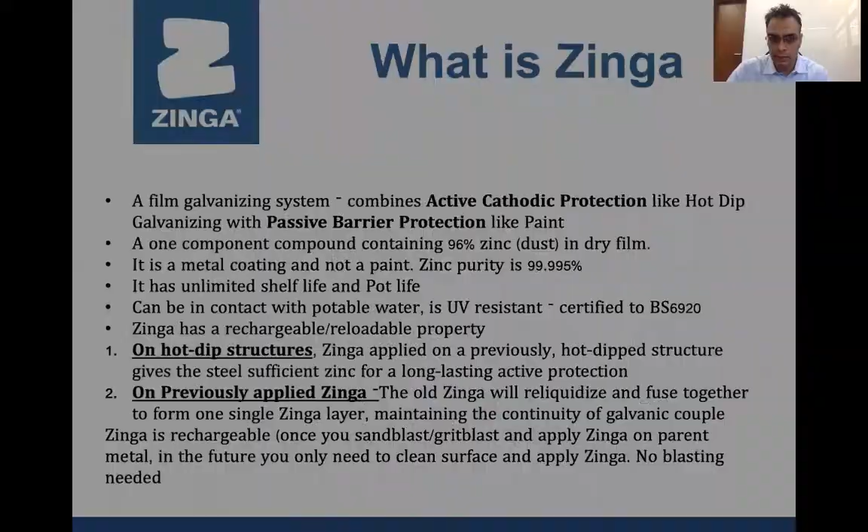It is a one-pack system, so its application is very easy. You just need to dilute it with Zinga Sol, which is the solvent required for this. It is approved in the Indian Railways and is already in the schedule of rates. We've applied Zinga in the north, east, west, and south over bridges. It is now under advanced stages of approval for long life.

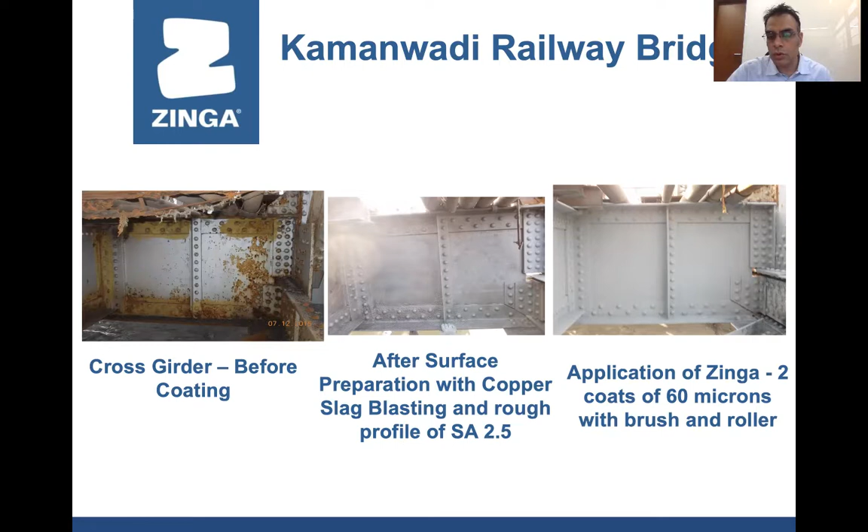These are some pictures where we have applied Zinga. You can see that metallizing causes some corrosion like this on the left. This bridge was 25 years old. We did surface preparation. The hard work is mainly the surface preparation, but that is needed if you want corrosion protection for 20-25 years. And then we applied 2 coats of Zinga. This is the Pamban viaduct, in the south.

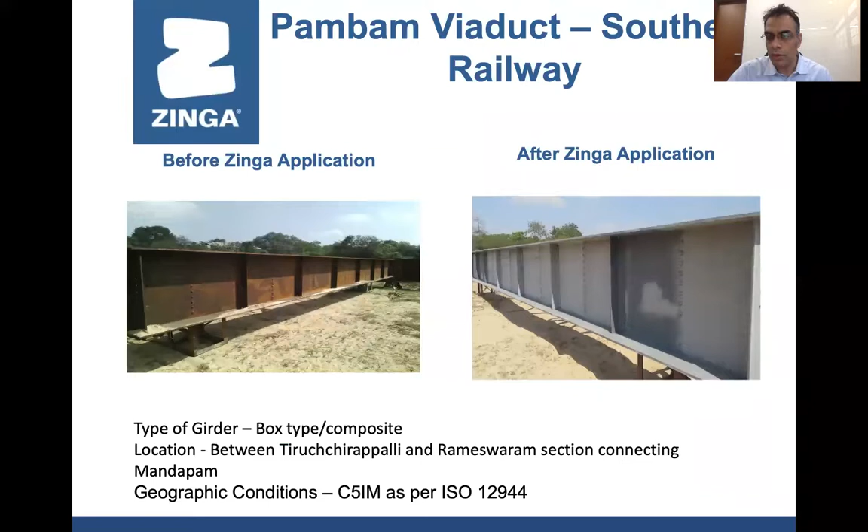Again, the corrosion environment as per ISO 12944 is C5, which is extremely corrosive, which means it's over water. So there also we applied Zinga. This has also been approved by MMRDA, and we have applied Zinga on 8 foot-over bridges in Mumbai from Jogeshwari to Dahisar. What we've done is, you can see that this is already there in the schedule of rates.

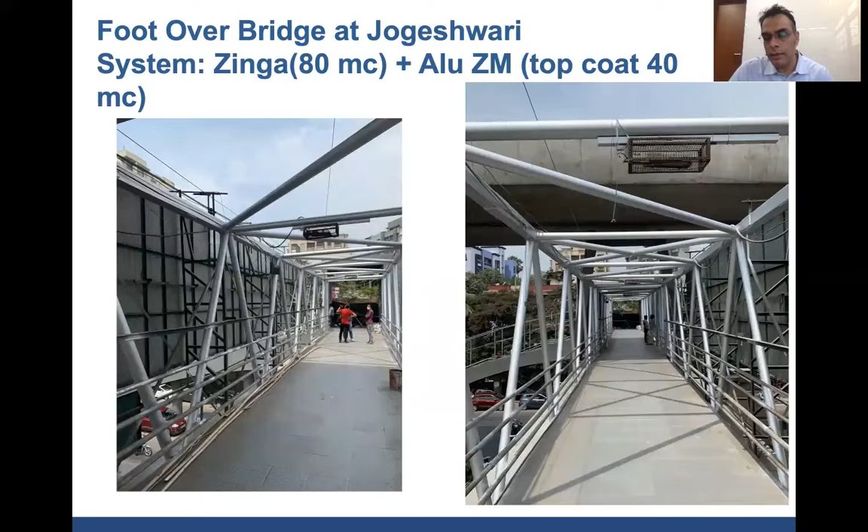We've applied a base coat of Zinga. We've done 80 microns of Zinga. Plus, we've applied Alu ZM, which is the silver top coat containing 92% zinc, 4% aluminum. So we've used this as a top coat. As a result, it gives a bright silver finish. And 8 FOBs in Bombay, as you see, they've been applied successfully. It's also been approved in Municipal Corporation of Greater Mumbai, BMC.

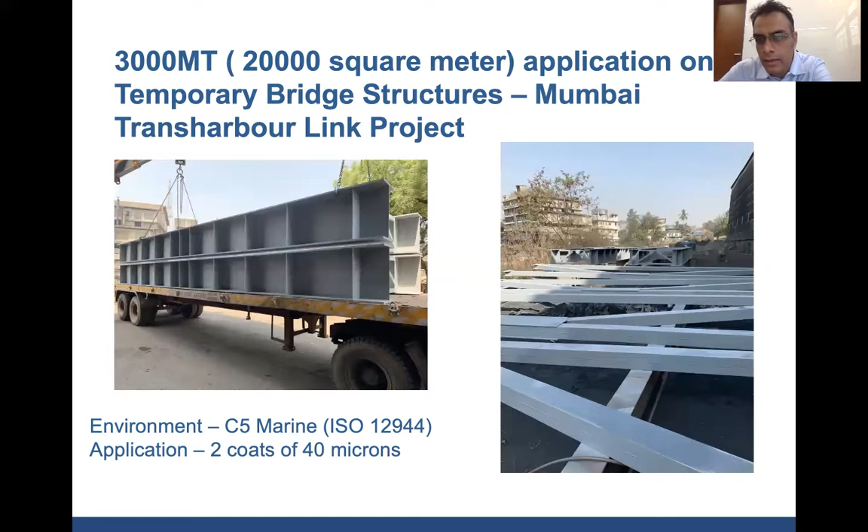And the biggest application has been for the Mumbai Trans Harbour Link project, where temporary bridge structures were manufactured by our sister concern John Galt International. And we have applied 2 coats of 40 microns on these structures. And the environment is again C5. So more than 20,000 square meter application has been done.

Other testimonials are from Mumbai Airport Terminal 1B departure, where the trusses base coat has been Zinga and then a white top coat has been applied. DY Patil Stadium, Wankhede Stadium, everywhere we've been applying there. And it's also being used for ductile iron pipes. It's used in ONGC for rigs, and it is being used for pipelines. So it's very useful there if you want 15 to 20 years corrosion protection.

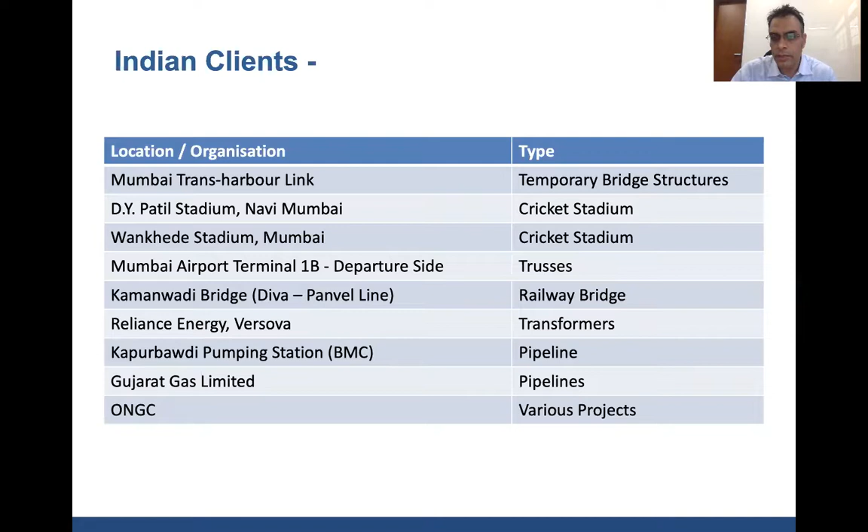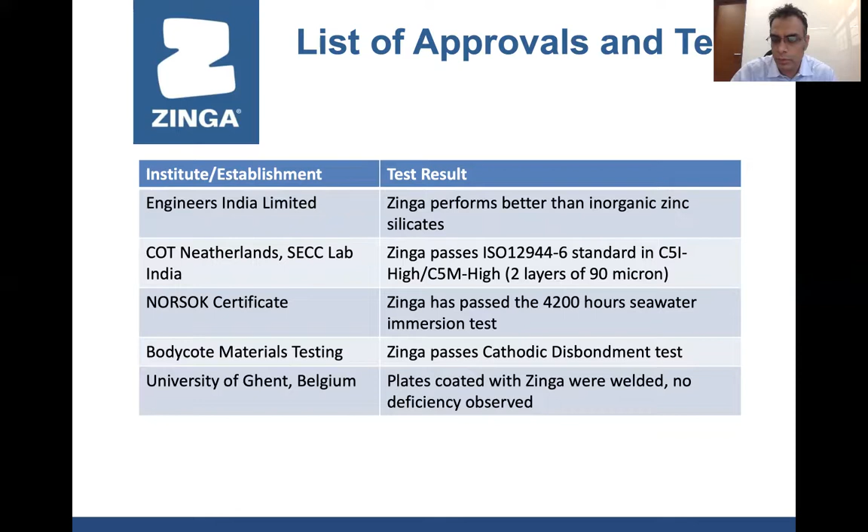It is approved by EIL, it's approved by IIT, it is approved by VJTI. So all the leading institutions have tried, tested and approved it. We have all testimonials available on request. You can apply it on old hot dip structures or new structures. You can apply it on structures which have been metallized, or thermal zinc spray has been applied. And whichever areas are getting damaged due to welding, cutting, etc., where sharp edges are there, you can apply it.

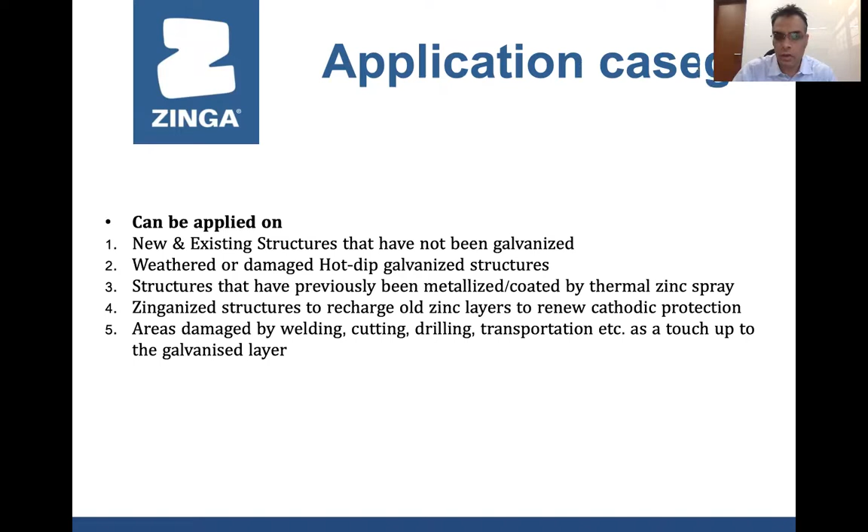So one good feature of Zinga is that if I weld a structure which has usually been painted, the paint burns off. In this case, the passive barrier layer burns off, but the active cathodic layer is still there, and you can just apply Zinga on it. You need to do surface preparation, that is very important, and you can apply it using brush, spray, roller, and it takes 48 hours for a full dry.

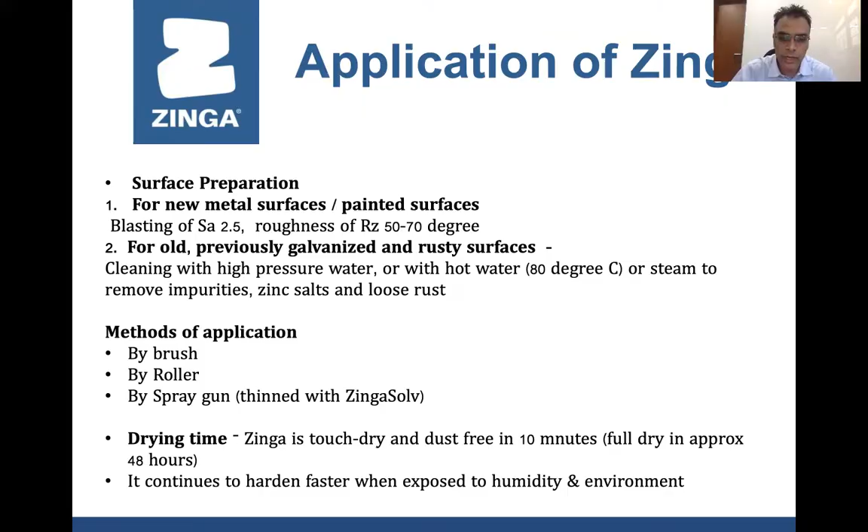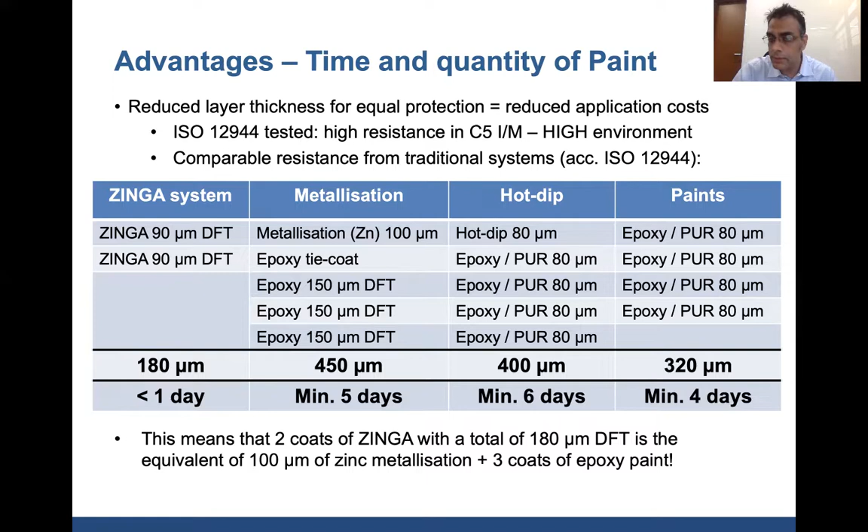And one big advantage is the speed, because we are applying less coating, only 180 microns in a scenario where normally my paint thickness with epoxy would be 320 microns. I'm applying only 180 microns. So the amount of Zinga needed is far less. And the time needed to apply is within a day itself, what normally would take 4 days due to high drying time. Humidity helps Zinga because the zinganization process takes place faster.

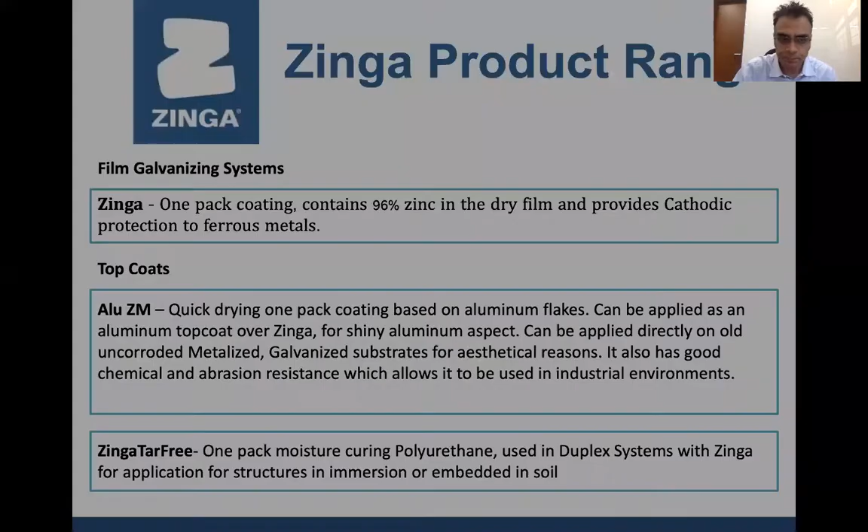And besides this, our products are basically, like I said, Alu ZM is a top coat having 92% zinc and 4% aluminum. Tar Free is comparable to coal tar for submerged underwater structures or where the splash zone is very high. We also have sprays.